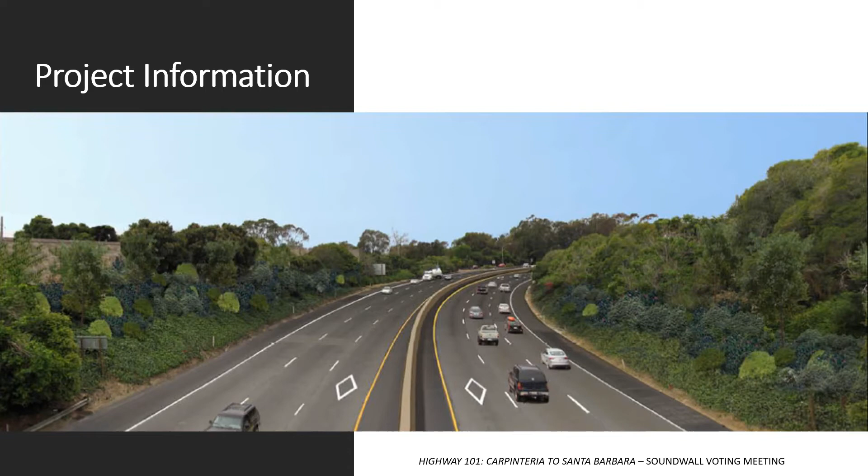I will now briefly describe project information and the status of the Highway 101 Carpinteria to Santa Barbara project. Caltrans is adding 1 high occupancy vehicle lane, or HOV lane, in each direction on US 101 within the project limits. The project begins at Bailard Avenue in Carpinteria and ends at Sycamore Creek in Santa Barbara. The project is about 11 miles in length.

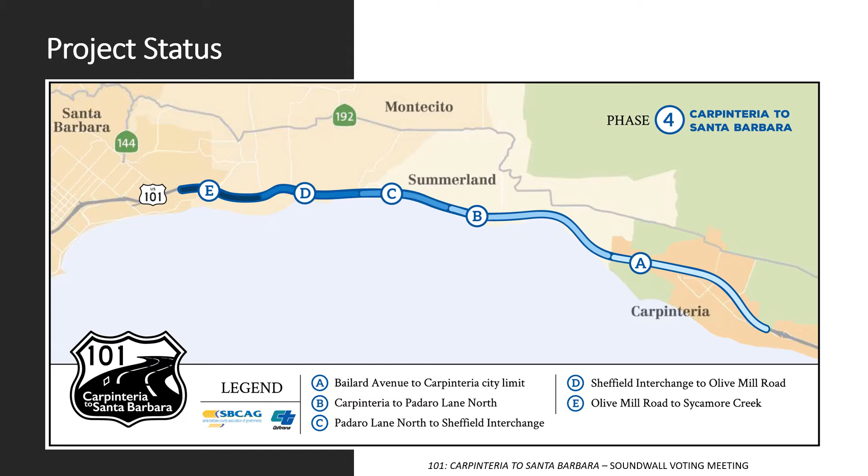The project is divided into 5 segments. Segments A and C are currently under construction. Segment B will begin construction by the summer of 2021. Segments D and E are scheduled to continue final design and permitting through 2021. Right-of-way certification is scheduled in 2022, and construction would begin by 2023.

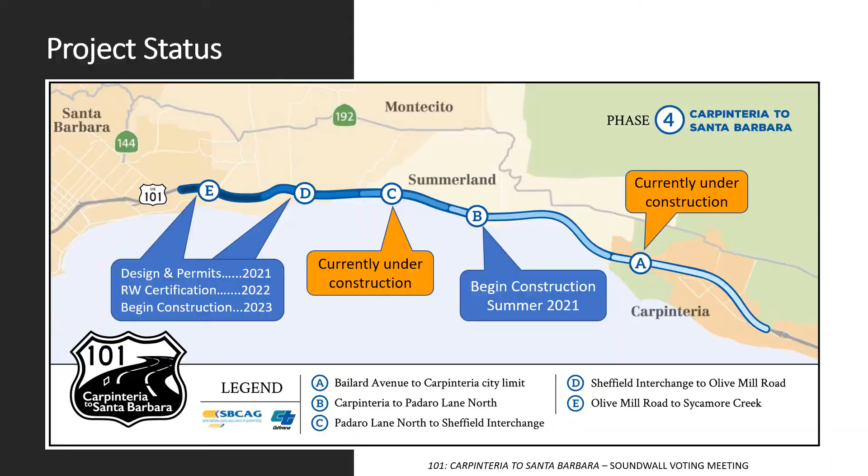Segments D and E, the last 2 segments of the project, start at Romero Creek in Montecito and end near Sycamore Creek in Santa Barbara. There are a total of 6 proposed Soundwalls. The proposed Soundwall affecting your property, as identified by the red arrow, is part of Segment 4D along South Jameson Lane between Humphrey Road and Olive Mill Road.

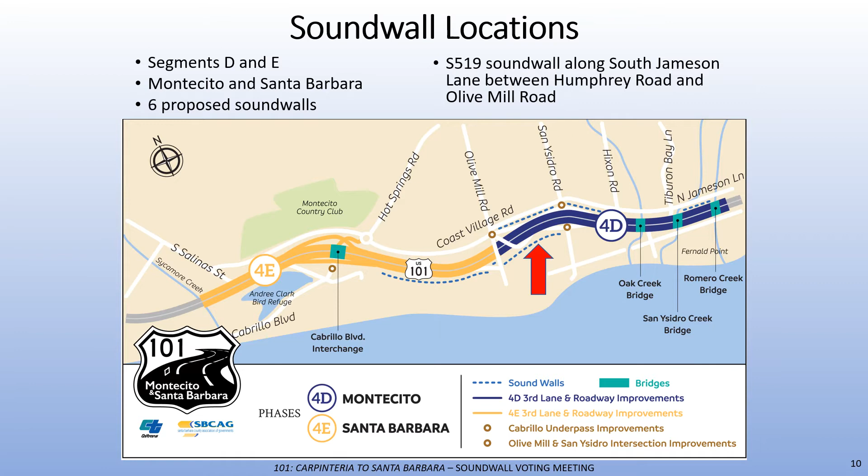I will now describe how Soundwall locations are determined. Soundwall locations are determined by following a 7-step process which includes identifying sensitive receptors, measuring existing noise levels, predicting future traffic noise levels, identifying traffic noise impacts, considering noise abatement, determining reasonableness, and making a final Soundwall determination.

Caltrans has completed steps 1 through 5 and is currently completing step 6, which is the process for determining reasonableness for Soundwalls. Step 6 has 2 phases. In Phase 1, Soundwall locations and dimensions were studied, along with engineering estimates, acoustic feasibility, and environmental effects. Recommendations were incorporated into the environmental document for public review.

In Phase 2, input from affected property owners will be considered through the Soundwall voting process. Your participation in Soundwall voting is an important part of determining the reasonableness of the Soundwall affecting your property. A reasonableness decision will be made by Caltrans considering the recommendations found in Phase 1, along with input from the affected property owners in Phase 2.

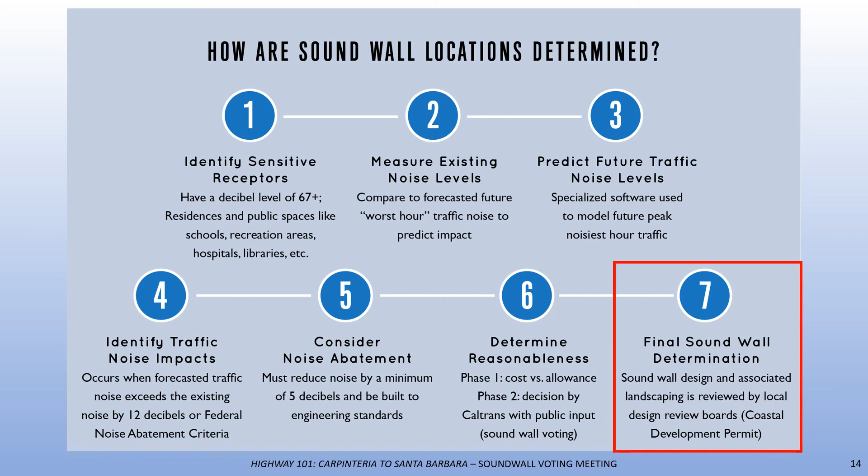The results of the Soundwall voting and input from the property owners will be taken into full consideration. However, final approval of Soundwalls will depend on the local coastal development permitting process. I will now provide information on the proposed S519 Soundwall affecting your property. These details were provided in the mail brochures you received along with the voting ballot.

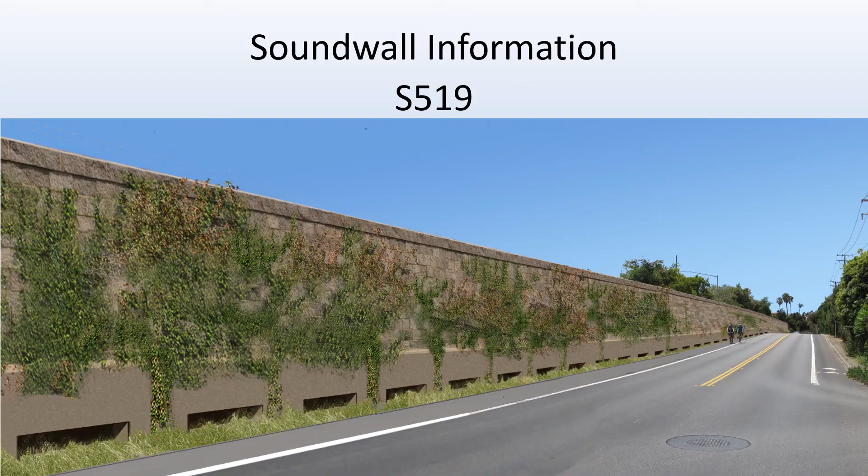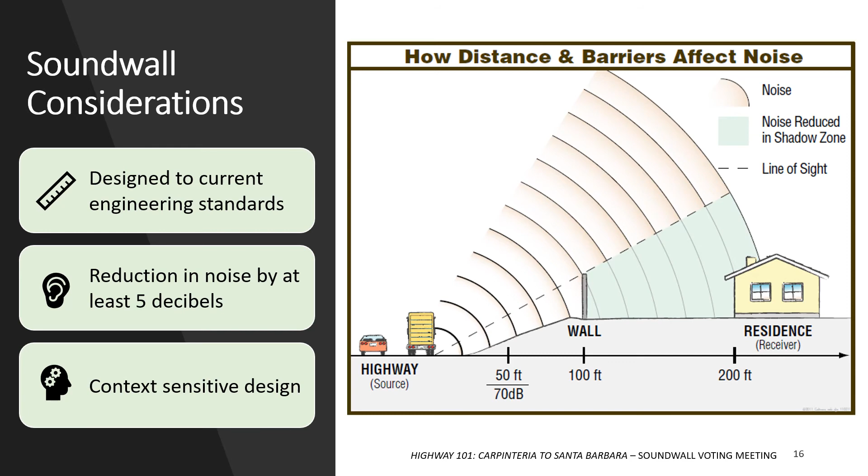Sound walls are constructed to lessen traffic noise impacts by blocking sound waves toward potential receptors. Sound wall height recommendations were determined in the traffic noise study and would be built to current engineering standards, which require that sound walls must reduce noise by at least 5 decibels. To be sensitive to the context, Caltrans will design sound walls that incorporate the character and aesthetics of their locations while also reducing sound transmission.

Some aspects of sound walls that property owners may consider when submitting their votes include the following. There is the potential of sunlight being blocked by the sound wall in certain areas at various times of the day. Removal of vegetation may be required during construction if it is located at the proposed sound wall footprint.

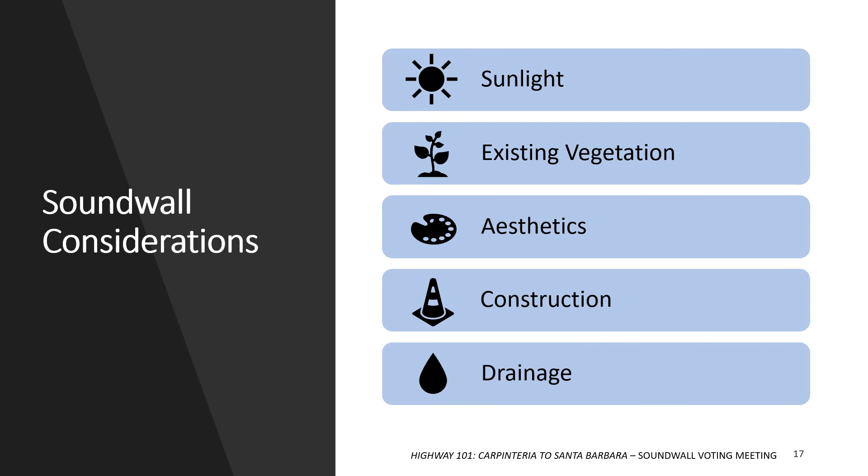Aesthetic treatments will be implemented, including texture and planting to blend in with the local setting, reflect community values, and discourage graffiti. Sound wall construction activities may create dust, noise, vibration, or temporary fencing that may temporarily affect adjacent properties. If a proposed sound wall is within a floodplain, it will include small flood passage openings for drainage.

The proposed S519 sound wall is on the southbound side of the US 101, along South Jameson Lane between Humphrey Road and Olive Mill Road. The wall will be about 2,105 feet in length and is shown as the solid orange line. The properties located within the area of the yellow dotted line are the affected properties. During the voting process, only the affected property owners within the yellow dotted line would be eligible to vote on the S519 sound wall. The sound wall will only be considered if greater than 50% of these property owners vote yes.

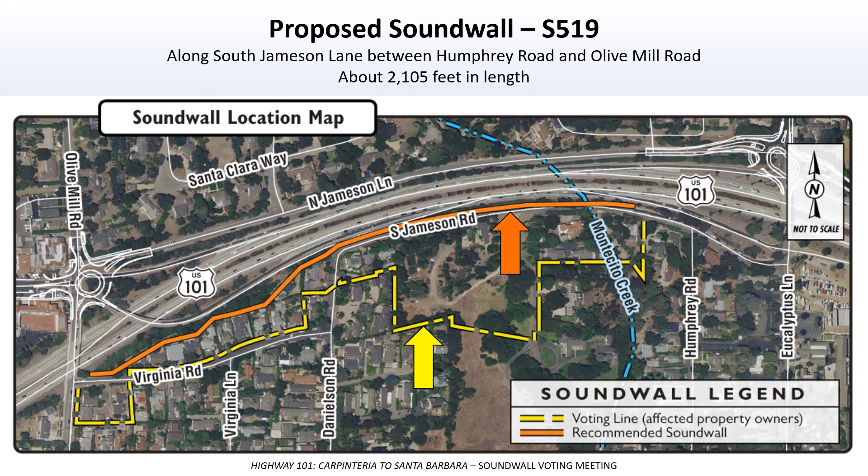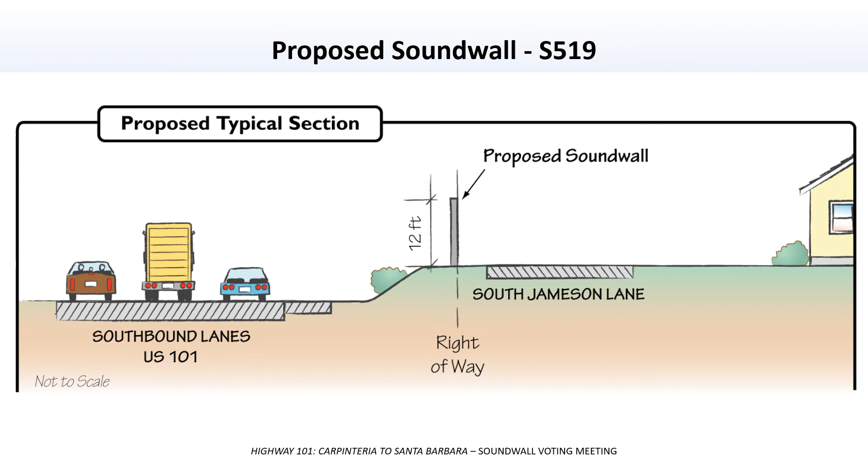Here is a cross-section of the S519 sound wall as it relates to southbound US 101, South Jameson Lane, and the affected properties. The proposed sound wall would be about 12 feet tall.

Please submit your sound wall vote by one of the two provided methods. Vote online at www.surveymonkey.com/r/soundwalls or return the provided mail ballot by the voting deadline of May 7th.

Final sound wall approval will be granted through the Coastal Development Permit. If you still have questions regarding this sound wall, please contact Caltrans by voicemail, email, or postal service to the attention of Jason Wilkinson, Environmental Branch Chief.